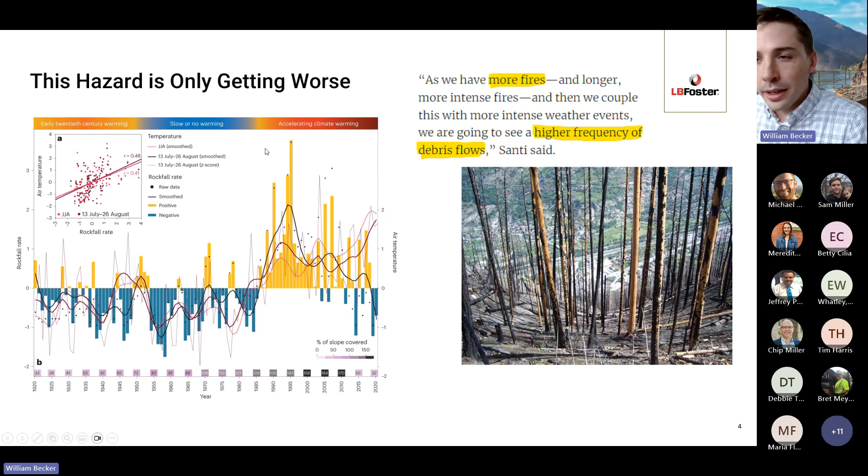So when you think back to the picture I had shown you, this was in a location where there was no form of protection, and it hadn't been a rockfall area for the railroad for some time. Now, when I say protection, I'm generally talking about one type of technology, and that technology is the rock slide fence. This technology has been around for a very long time.

The way that it works is it's a series of wires strung up along the tracks, and when those wires are broken, it can indicate there was a potential rock that has broken through those wires and fallen onto the tracks. As I mentioned, this is the industry standard - it's what you see at most railways. It's an old technology, been around for 140 years. First deployed in Scotland, came over to the US, and it is what you'd expect to see when we're talking about rockfall protection. As far as the monitoring side, there are some solutions as far as mitigation, but when it comes to monitoring, this is your bread and butter.

I think a question that a lot of people might ask is why have we seen so little innovation in this space where the technology is 140 years old? It must work really well, right?

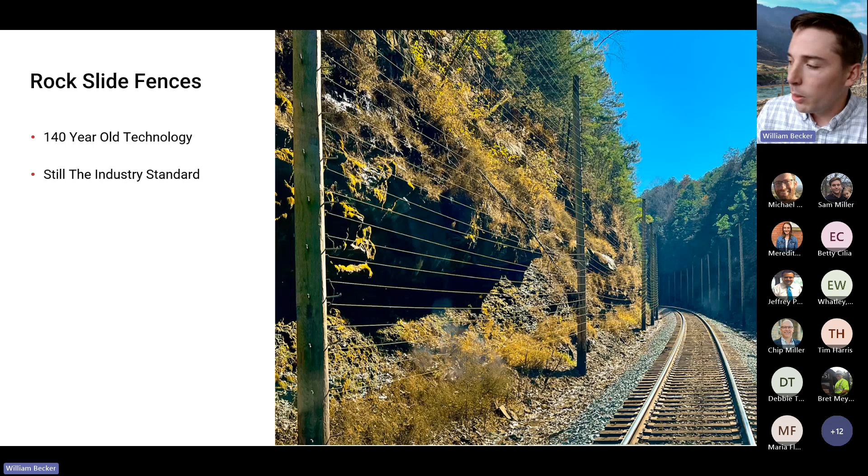We had a really unique opportunity about a year ago to take a look at a slide fence network at a major Class One railroad, covering their entire network over the course of the year. We understood every single activation that they saw.

They tabulated exactly what caused their fence to activate, along with some other key metrics. What you can see on the graph here is that most of these slide fence events were caused by benign incidents, things like a tree branch. You can actually see in my picture that there's a tree branch in those wires, and something like that can cause it to break. Lots of the time these fences break and it's really not known what causes the activation. Plenty of small rocks - if it just hits a wire just wrong, it's going to cause an activation.

There's also things like wildlife. But the true reason these are used is that there were 10 large rocks that fell on the tracks and it caught these 10 large rocks. That's been why this technology has been used.

That being said, I mentioned 10 true events here, but there were also two missed detections in this period. Luckily, these two missed detections did not result in derailments, but they involved rocks of a size that could have caused a derailment, found on the tracks, and trains stopped short of them. These are incidents that are absolutely critical to be stopped.

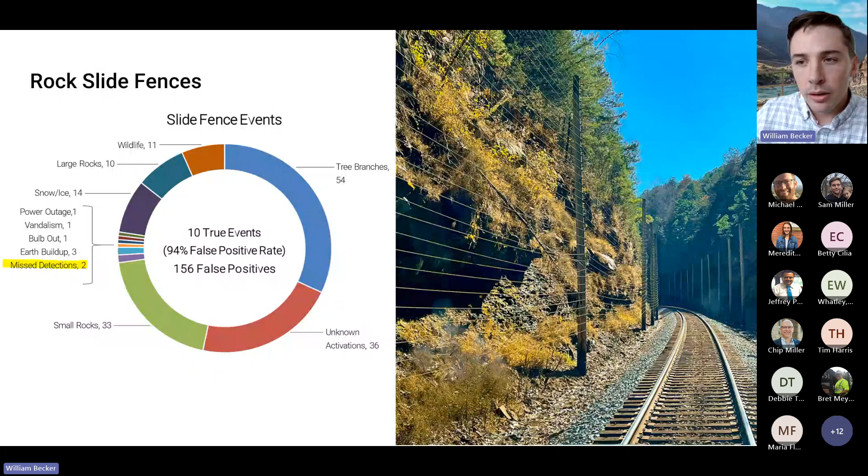This railroad gave us a lot of different metrics, some related to their operational efficiency, and what we saw was hours of network delay. On this railroad, trains were lined up in a way that in their crucial corridors, you could be seeing as many as 9 to 10 hours of network delay for a slide fence event, particularly for certain fences that were more remote.

It could take hours and hours, potentially even days, for those fences to be repaired. Sometimes in the winter months, when there was ice buildup on the wires, those fences were down for weeks at a time. Each time one of these fences activated, a lot of the time this is call-out labor, overtime work, not expected or planned, and every single one of those activations resulted on average in about $2,500 of labor costs. So when you have a network of slide fences experiencing hundreds to thousands of false activations in a year, this cost can really add up really quickly.

This was kind of the driving factor - once we did all this research into what the status quo was and where the industry is when it comes to rockfall prevention, this drove us to look into new solutions to not only bring down costs from these delays, but also increase safety from those missed detections in areas where you see these rockfall events.

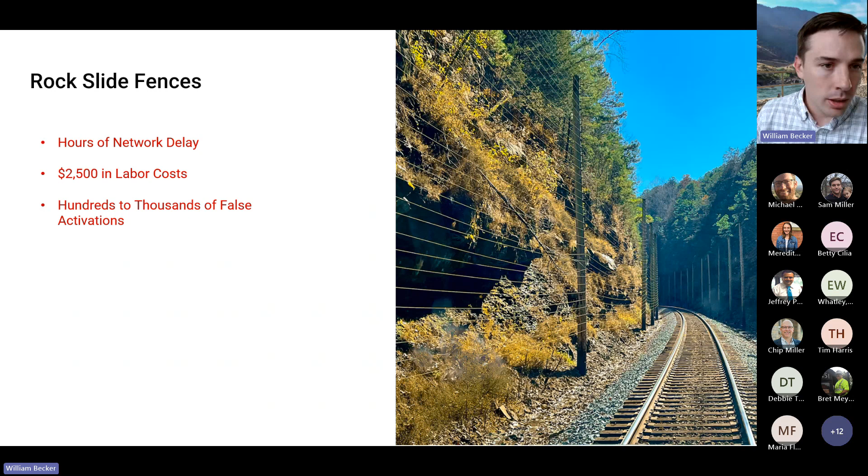What we brought to the market is a pretty cool technology, what we're calling our LB Foster Rockfall Monitoring System. In this picture, you can see a series of our LiDAR units placed strategically along the tracks to scan the entire track.

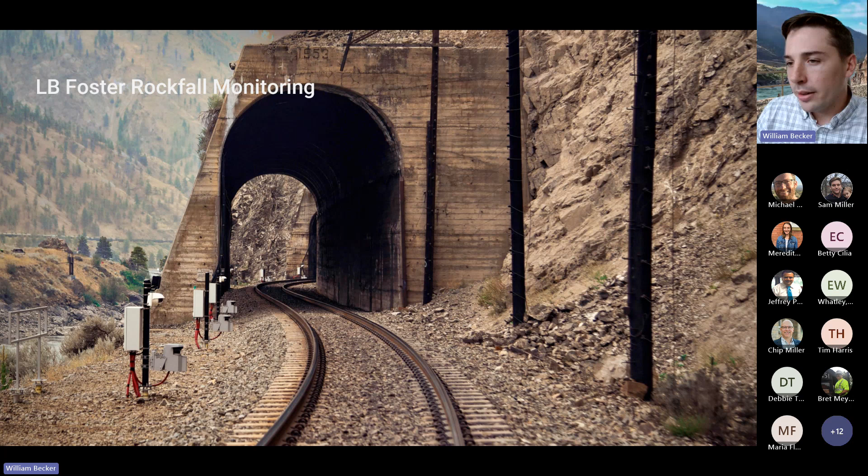The basis of the system is what we call our Insight LiDAR. The way it works is that we're sending out beams of light, 100 feet in every direction. In the graphic below, you can see it sweep through the scan, and each one of those beams represents 100 feet - it's scaled down just to fit on this slide. We're doing that 20 times per second, or 20 hertz, so we're getting almost instant pictures of what's going on the track.

Now, we selected a specific LiDAR that has 190 degrees of scan. So what this allows us to do is put it pretty close to the track. And if you have some curvature that curves in towards the LiDAR, we can actually see a little bit behind ourselves. So it allows us to be more flexible with our LiDAR placement.

What you're seeing on the screen here is a 5-degree separation between the beams just for visualization, but our actual spacing is 0.25 degrees. So you'd see 20 times as many beams on one of our scanners. And so really, we get a really dense coverage of the entire scan area.

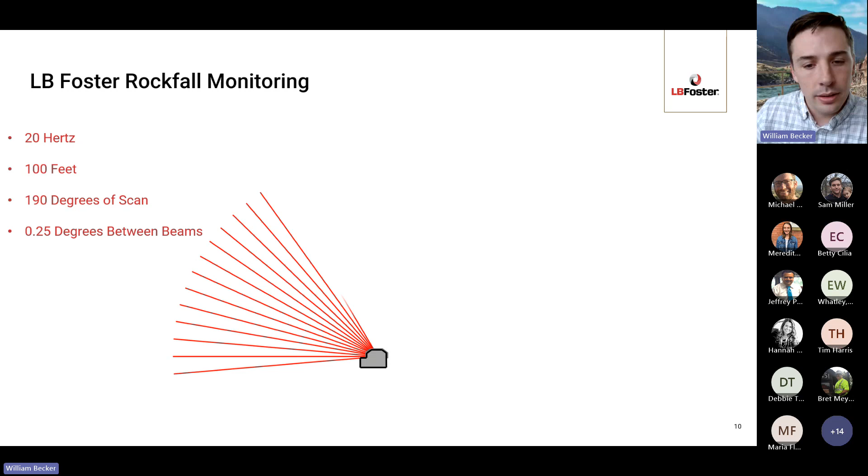Now, translating this to what it looks like when we put this on a railroad track, what you see is that we cover the entire railroad track. The length shown here is around 170 feet of track, since we are cropped at the ends. And noticeably, if you look towards the top of the picture, a lot of the beams are going out. Some of them are even going so far out that they're striking, in this example, an embankment.

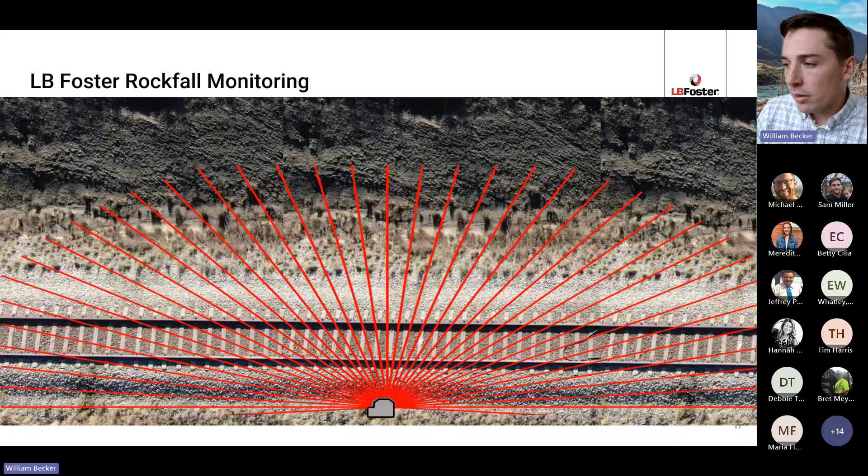What you might notice is that there's a pretty large shoulder at the top of the screen, and potentially rocks could come down this slope and land in this embankment. They would pose no hazard to rail operations, but they are getting picked up in our scan field. So it's something we identified: we want to limit our scan zone to only focus on the portion of the track that we want to make sure is clear of rocks for safe train travel. And so that's what we call our detection zone.

What we do is we shrink down the zone. The beams are still traveling that full distance, but in our software we define the zone and we call it our detection zone. And only obstacles that land in this zone will generate an alarm.

Now, we want to be really safe about anything that lands in the detection zone and be sure that we're picking it up. So we went with a safety critical design using safety critical components. Part of that inherent design is using redundancy. So what we'll do is add a LiDAR on either side of the main LiDAR to have redundant and overlapping scan field coverage.

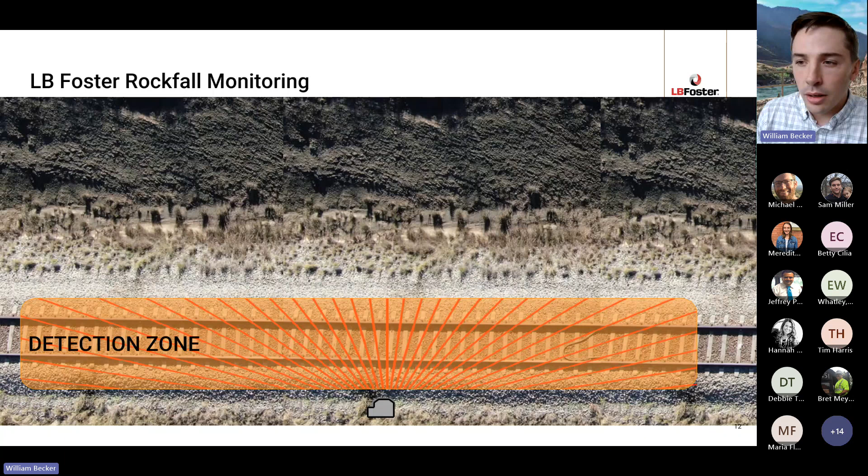What that looks like in practice is like this. And once again, I want to call out that we have 20 times more beams than what's shown in this example. So you can imagine that coverage of scan beams, and the scan field is a very tight mesh. Any obstacle that enters that scan zone, we're seeing from multiple angles, multiple beams, and really able to determine the precise object size and position in the detection zone. So generally, that's how the system works.

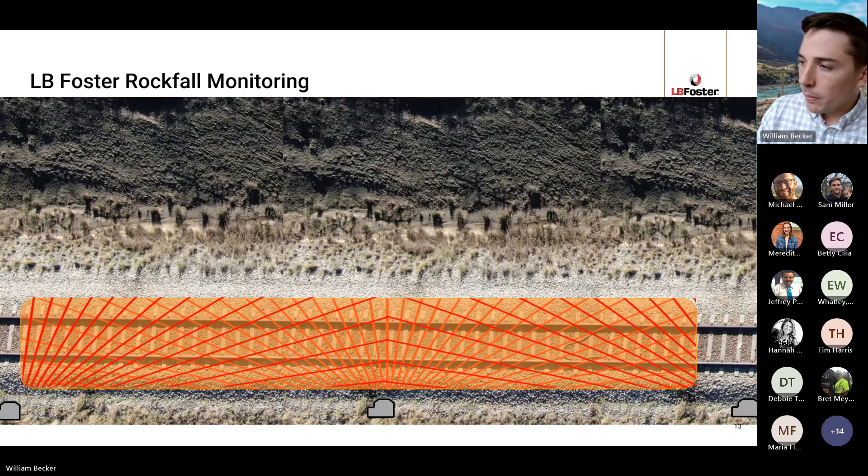When it comes to the rockfall monitoring layout, starting in the bottom left for clarity, inside of a signal house or bungalow, we're going to have our control rack. In that control rack, you're going to have local control of all of your LiDAR. That's where your maintainer is going to interact with the system, and a PLC that will give an indication of a clear or obstructed track.

Leaving the bungalow, you're going to have two main cables. The first will be a 24-volt DC power cable, running power to our trackside junction box. We'll also have a fiber and/or Ethernet cable. The reason it's 'and/or' is that sometimes these bungalows may be far away, and if that trackside junction box is greater than 300 feet from our signal house, we're going to run fiber. If it's closer than that, we can run fiber or Ethernet - we're given that option.

From that trackside junction box, we take all of that and run everything through a PoE Ethernet out to each LiDAR unit. This makes the wiring to each LiDAR independent and also adds simplicity to the wiring.

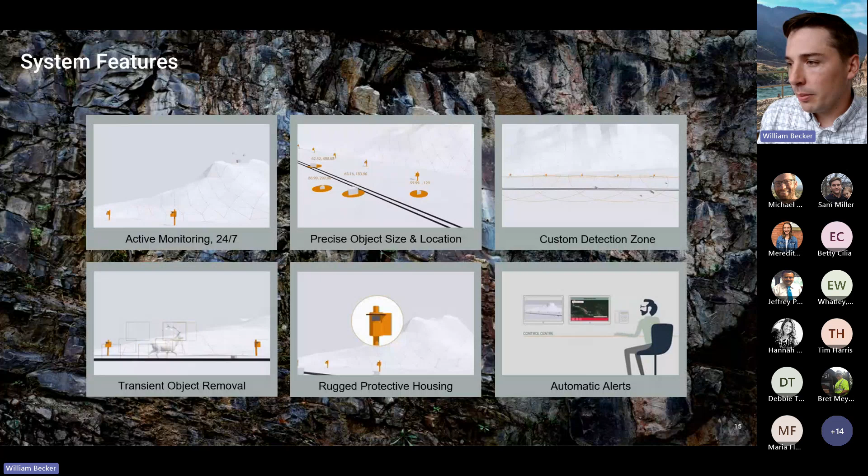So there are a lot of cool features that come with our system. I think most notably, this system is always on. It's always scanning, as a requirement, since a rockfall could happen at any time. And so we have 24/7 monitoring.

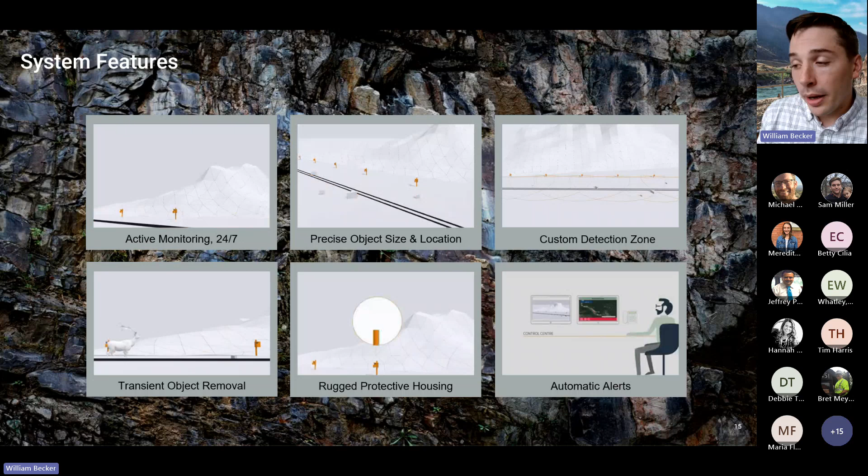Anything that falls into our custom detection zone, we're going to alarm on. That being said, there is potential for other things to enter the detection zone that you may not want to alarm on. For example, if wildlife were to walk through the detection zone, our system can tell the difference between moving obstacles and obstacles that come to rest. We're only going to alarm on obstacles of qualifying size that come to rest in that detection zone.

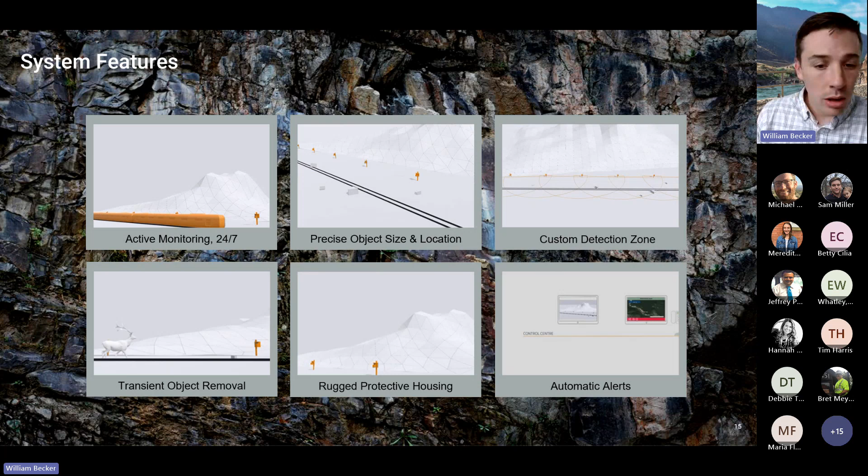All in all, we're going to put that in a ruggedized protective housing. Our housing, I can tell you from experience, is ruggedized. We have taken many direct hits from rockfalls. It's even been hit by on-track equipment, and the LiDAR continues to operate as expected.

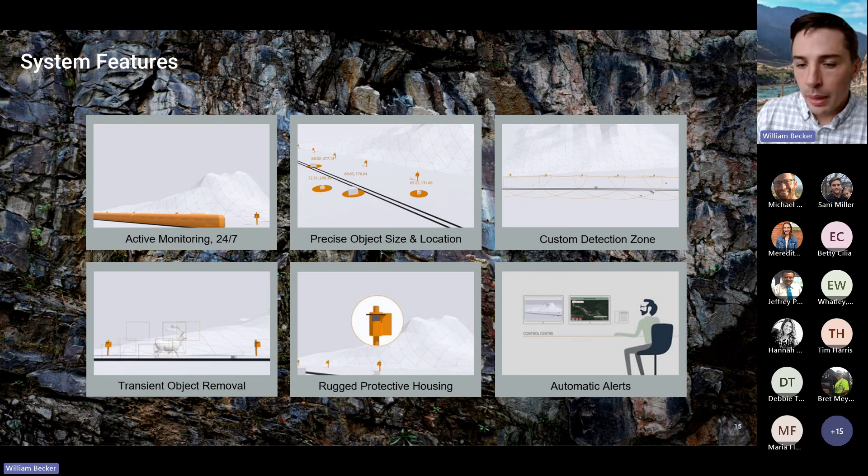And then finally, we have automatic alerts. So you're going to get head and shoulders more information from a rockfall monitoring system than you would from a slide fence. You're going to know exactly what caused your alarm.

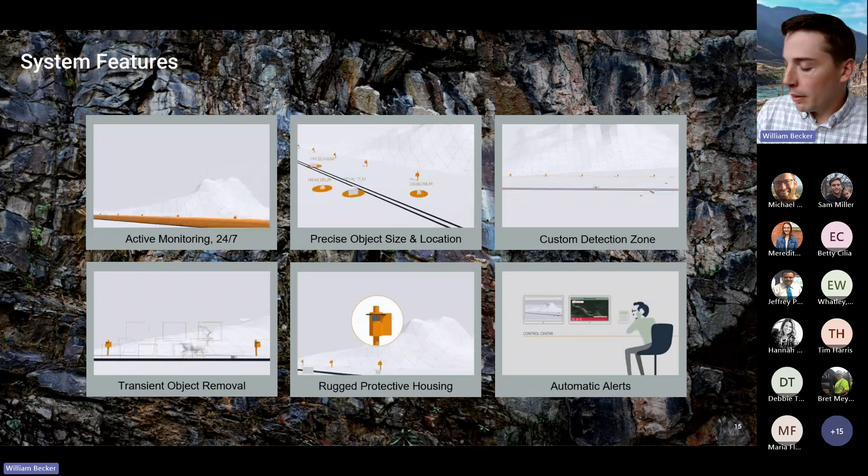When it comes to our outputs, I'd like to go over the options we have. Currently, there are several different methods for our outputs. The bread and butter output would be a clear, unobstructed relay inside our unit that's controlled by the Vital Logic controller. That can be inputted directly into your track circuitry or signaling system to indicate whether your track is clear or obstructed, so oncoming trains can safely stop before they reach it.

Additionally, we generally recommend cellular or data communication to these rockfall monitoring sites. As an additional feature, those pictures I was talking about can be sent directly to your control center or dispatcher via email or text message. We package that into an email or text message, along with a list of people for every site. So let's say you had a site with a couple of maintainers plus a dispatcher who wanted to be notified—you'd put them on the list through our web portal, and they'd get those alerts.

And then lastly, there's the online portal. Every single system comes with this online portal. You log in and are able to see all of your sites, the real-time condition, get on the PTZ camera, see any active alarms, and really understand the status of a rockfall monitoring system in real time.

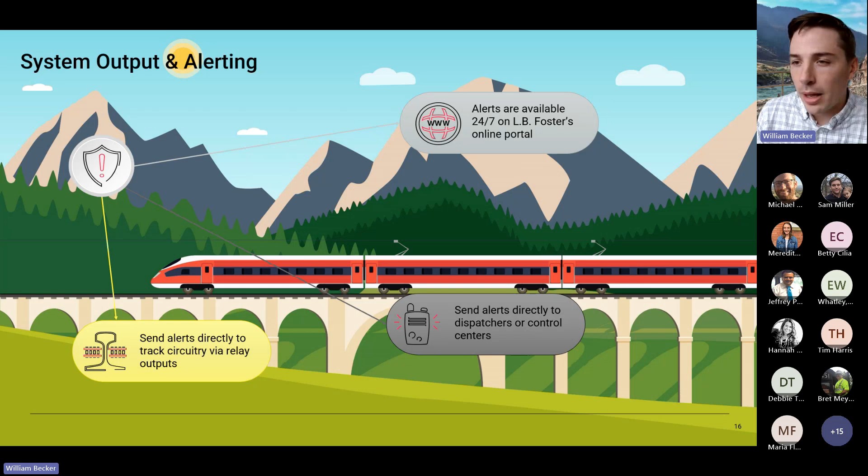Just because I think it's a pretty system to look at, here's another picture of one of our rockfall monitoring installations. We have installations throughout the United States and Canada. This installation here is at a location called Devil's Throne in New Mexico.

One thing I wanted to touch on is that the rockfall monitoring system has really been tried and tested in a variety of environments, from the desert up to the Canadian wilderness out on the Pacific Northwest. This LiDAR platform has been truly tested.

Another thing I think is good to note is that this LiDAR platform has been used beyond rockfall monitoring. It has a pedigree that started in 2010, when we were using it at grade crossing monitoring systems. The backbone technology of the rockfall monitoring system has been tested at over 120 crossings, and that's really what brought us into this object and obstacle detection space.

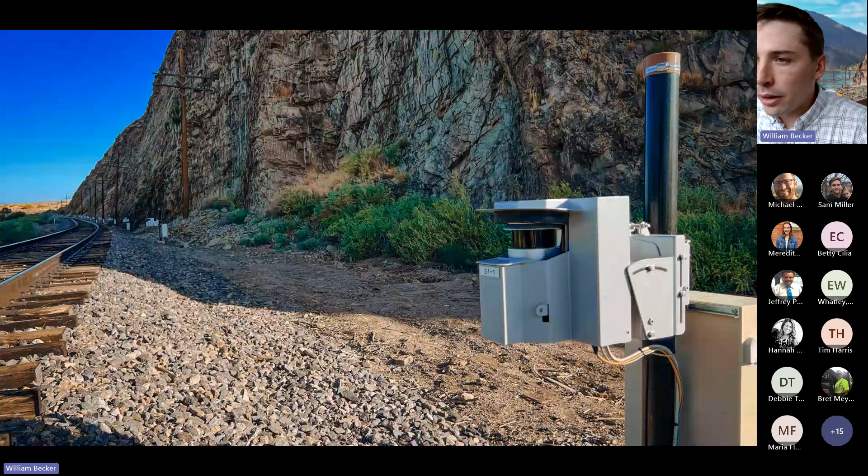So the LiDAR isn't the only component that comes with a rockfall monitoring system, and I wanted to go through some of those. Other major components, obviously, include the LiDAR head assembly, and generally what we'd include is the mounting posts and brackets, plus the trackside junction box. One thing I should mention about that junction box—it can handle up to 8 LiDAR per junction box, so you're going to get one junction box per up to 8 LiDAR.

Additionally, we would generally include a camera and illuminator that's recommended with every system. And finally, we have a new and upgraded control panel that has basically everything your maintainer would need to service the system. When they interface with the system, they'll go into the signal house and look at that control panel. There's an integrated screen on an HMI where they can see the status of any LiDAR in alarm, any maintenance activities needed for the site, and easily diagnose and maintain the system from that control panel.

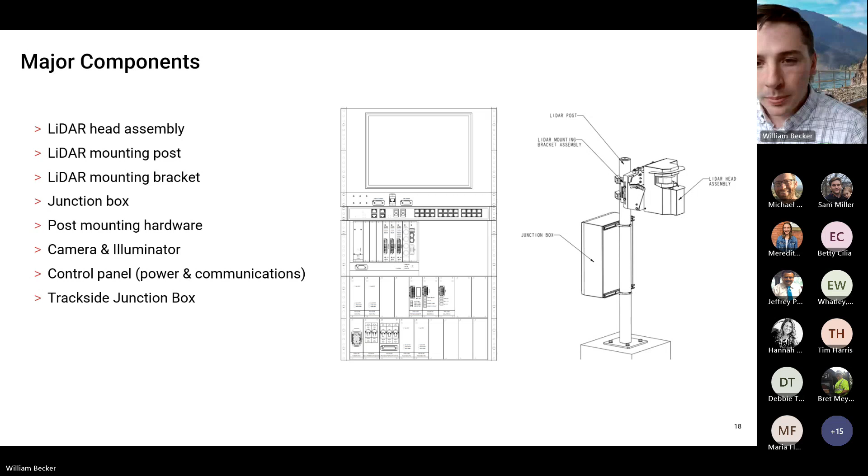So I want to take some time now to go over the installation component. The installation of the Rockfall monitoring system comprises several key activities.

First of all, there's the mounting of the LiDAR. Once a site has been selected, the LiDARs need to be mounted, and the first LiDAR would begin at the very beginning of where the Rockfall potential area starts, and the last LiDAR would be at the end of that zone. That gives us the redundant coverage. Generally, what we space them at is around 90 feet between each LiDAR. So if you had 200 feet, you'd be looking at around 3 LiDAR to do that - one more than needed, so 90, 180, and then you'd add a third LiDAR to get that 200 feet and redundant coverage.

Those LiDAR, the first thing that's important is that they're all mounted at around the same height. So we're going to put each LiDAR up at the desired height. Generally, we're recommending 24 inches above the top of the tie.

Once they've been mounted at that height, we want to make sure that all the LiDAR are scanning at a level plane. What you can see in the picture on the right is what's called a laser area checker, and we put that on the tracks at 24 inches above the top of the tie at 2 different places, making sure through our adjustment bracket that we're adjusting the roll, pitch, and yaw of the LiDAR to hit the middle of that laser area checker at the 24 inches as recommended. Then you repeat that process down the entire section of track until all LiDAR are leveled and pointed over your detection zone.

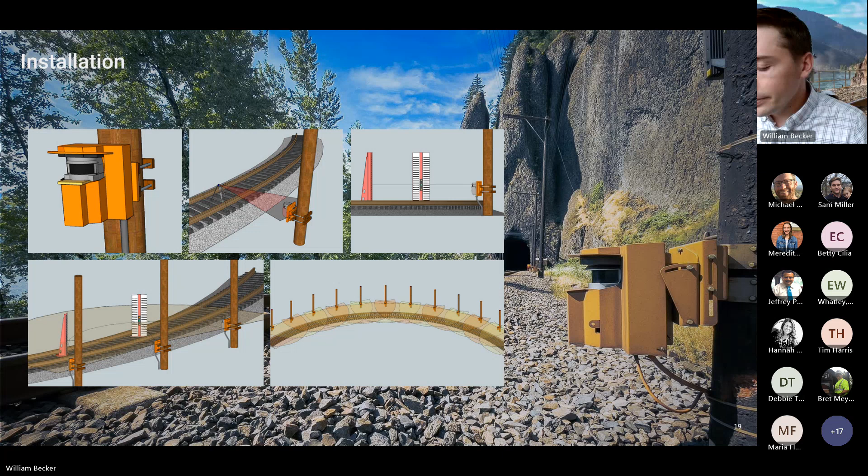Now, the biggest advantage that the Rockfall monitoring system has is maintenance. This is the biggest advantage it has over a slide fence. And so the maintenance is fairly light.

As needed, we recommend that you clean the lenses - that's a visual inspection. Potentially every 6, depending on environment, up to 12 months, we recommend that you're cleaning those lenses.

Along with that, on a 6-month basis, we're asking that you do a visual inspection of the entire site to check for damage, infestation, and check the condition of all your seals, vents, and fans. Then at the 12-month inspection, do a more thorough system check - checking the main panel for voltage drops, checking for damage to the post, and checking for any movement of equipment. That would also include ensuring the alignment of all LiDAR at a 12-month inspection period.

And that pretty much covers the rockfall monitoring maintenance as far as it's needed. Now, one thing I also want to cover is that when a rock does fall on the tracks, this is where you're going to get the greatest maintenance gain. The only thing that's needed to reset the system to normal operation is removal of that rock from the detection zone. Once the rock is removed, the system will automatically assess that the zone is clear and go back from being an alarm to a clear state. So compared to any other technology, the resetting of the system is very seamless.

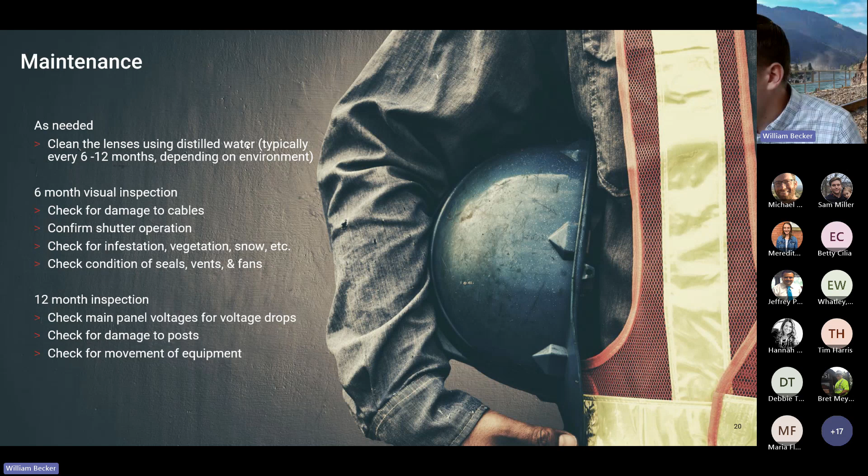That's a great question, Dan. The number one reason we're using a single laser profiler, or 2D LiDAR, is that our output is most reliable when we're reducing the custom information and training needed for each site-to-site basis. Going back to our overview, one thing we found is that this layout with a detection zone and a 2D LiDAR works from site to site to site. We'd expect this detection zone, which we generally define as 6 to 7 feet from track center in either direction, to be clear at every single site we go to, so if something is in that area, we can quickly determine there's an obstacle on the track. We went with 2D LiDAR rather than 3D LiDAR because it's more reliable at every site and requires way less custom work to install and configure. That leads to really high system reliability for obstacles we see in the detection zone, and confidence that those obstacles are something we should alarm on.

Next question: is this Buy America compliant for federal funding? Great question, Chad. While a lot of the components come from overseas, we have used Buy America funding for this system in the past — we did an installation that was federally funded. Typically, this is done because there's no equivalent U.S. technology that meets this requirement. Also, as we've developed this technology further — most of it, when we started installing these back in 2018, was produced in the United Kingdom — in the past few years we've actually been bringing a lot of the technology back into the United States. Today the system is being produced in Dublin, Ohio. So the answer, long as it is, would be yes, we could get Buy America funding for this technology.